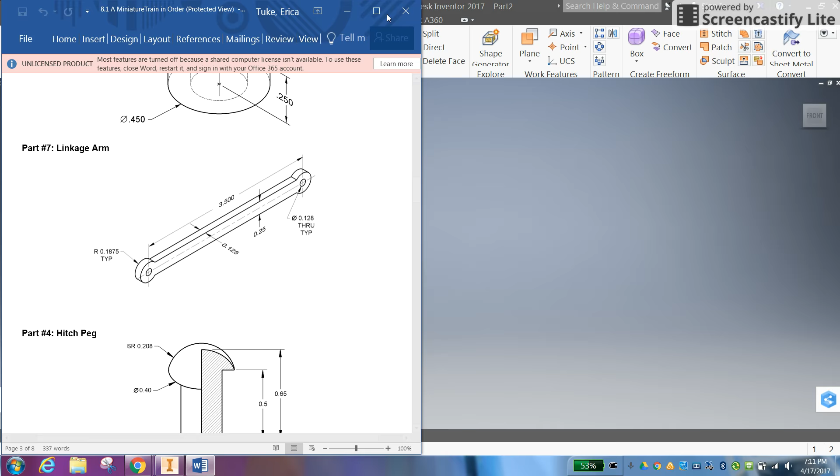So as you're looking at the drawing file here, there's a couple things you want to note. We have 4 circles that are connected by 2 straight lines. So we have a larger circle and a smaller circle. They are concentric, which means they share the same center. And we know this because of the center marks and the center lines that are aligning all of those. We also notice that the center of this part also shares the same center line of the circles. So that'll be important as we're dimensioning this 0.25 inch dimension.

The first thing I want to start off with is making these circles. So I need to look for the dimensions. This first one, the larger circle, you see the leader line is pointing to the larger circle, has a radius of 0.1875 inches, which is typical. This means that this dimension can be assumed for both this circle and the other one over here that just looks just like it. And my smaller circle here has a diameter of 0.128 inches. It goes all the way through the part, and it's also typical, which means it can be assumed for the other piece.

Now, when you're making circles in Inventor, it's going to ask you for the diameter dimension. So that means that with this radius, we have to make sure we multiply that by 2. You don't need your calculator to do that. You can just go ahead and type in the equation in Inventor. So let's go ahead and get started there.

So I'm going to start a new 2D sketch on my XY plane. It does not matter where you begin this sketch, but I'm going to go to my circle and say 0.1875 is my radius times 2. I have another circle inside of it that is 0.128, I believe. Let me double check that. Yep, 0.128 inches. And then I'm going to go over here and do the same thing, 0.375, and then 0.128.

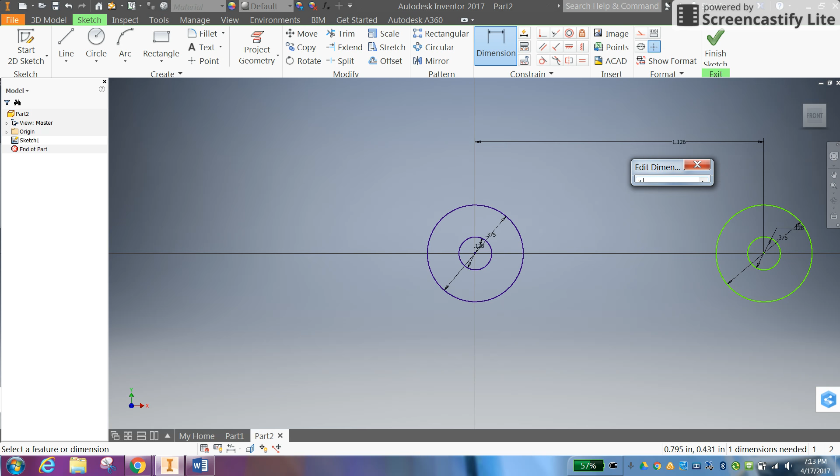Now, based on my drawing, I know that these circles are 3.5 inches apart. So I'm going to go back to Inventor, go to Dimension, click on the center of this circle and the center of this circle, and say that those are 3.5 inches apart. And now that those are evenly spaced out, what I can do is go up here to my Line tool, and I'm just going to simply connect these 2 circles. Now notice I'm not dimensioning anything right now. We'll get to that in a second.

But one of the other dimensions I need to figure out is this 0.25. So since my circles share the same center line as the entire part, I know that the distance from the top of the part to the center is going to be 0.25 divided by 2. It's divided in half. So from the top of my part to the center, it's going to be 0.125 inches. And from my bottom of the part to the center, that's also going to be 0.125 inches.

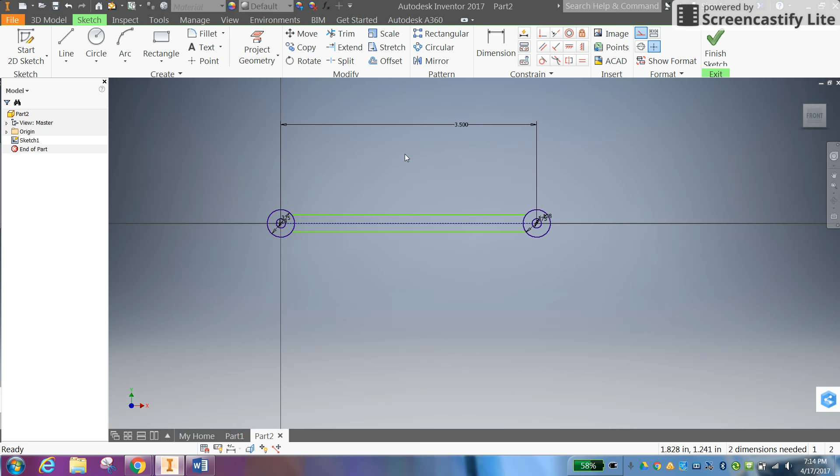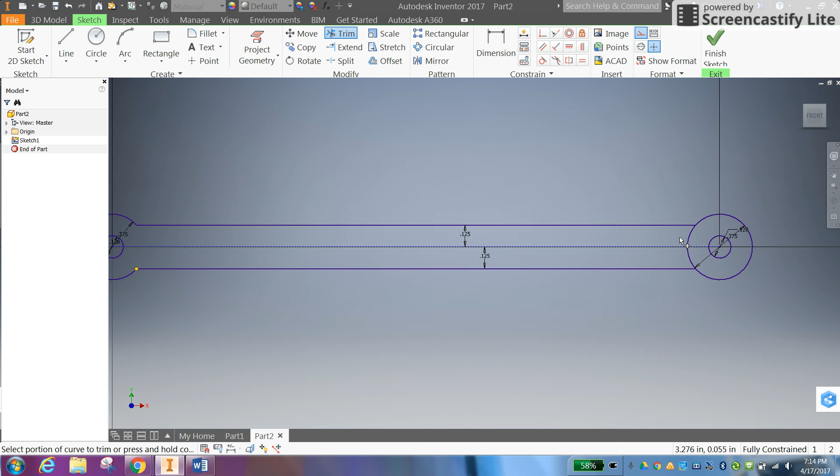So let's go back to Inventor. If you want to make a construction line that goes through the center of the part, just something easier to dimension to, you are more than welcome to do that. I'll say dimension, top of my part to my center line, it's going to be 0.125 inches. Center line to the bottom of my part, you can also do 0.25 inches divided by 2. Enter. And now all I have to do is go to my trim tool, trim out some of these lines that we don't need. Don't worry about trimming your construction line. You're not going to see anything. And now let's finish my sketch.

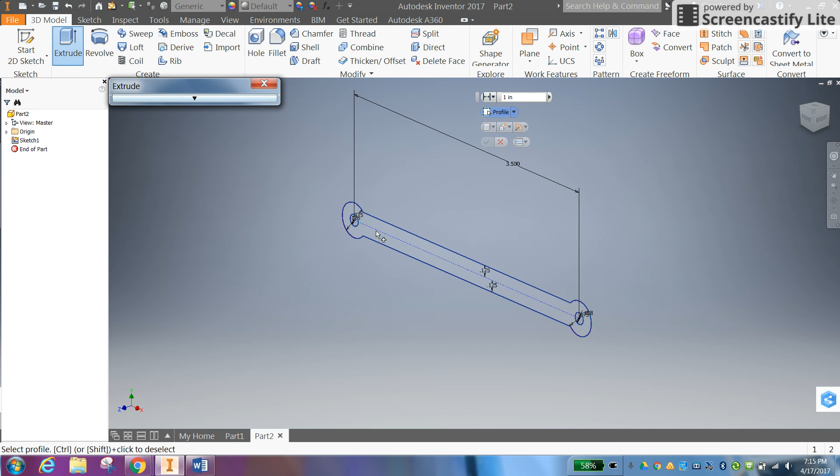And all we have to do is add thickness. So the thickness of this part is 0.125 inches. Notice that the arrows are pointing to the thickness of that part. So I'll go to extrude, click on my profile, type in 0.125 inches, press OK.

Feel free to check the volume to make sure that you are correct. So we're going to go to File, iProperties, go over here to Physical, and say Update. And your volume is going to be 0.123 cubic inches. As long as you have that, that means that your part is done correctly.